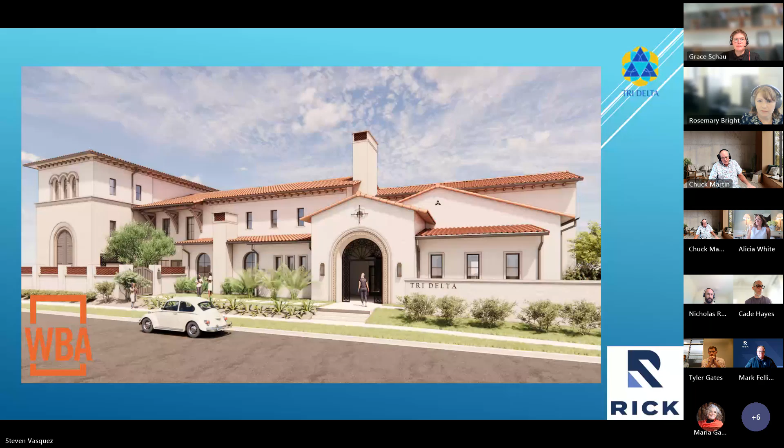Good morning. My name is Steven Vasquez, and I'm with Rick Engineering. We're located at 3945 East Fort Lowell Road, Suite 111. Thank you for your time.

We are here to discuss 2 landscape variances we are requesting regarding the development of the new Tri Delta sorority. Our presentation will cover the project background, our planning considerations, our requests, and also show that the U of A has accepted these variance requests.

This project is located at 1541 East 2nd Street at the northwest corner of 2nd Street and Cherry Avenue in Tucson, Arizona. It's approximately 0.6 acres in size and is currently fully developed with a single building and associated landscaped and paved parking areas.

The site, as mentioned earlier, is zoned R3. The existing building was constructed over 50 years ago. This new proposed project entails demolition of the existing building and the construction of a new building and associated pedestrian access, parking, utilities, landscaping, and drainage improvements.

The site is directly across 2nd Street from the walled main campus of the university. The uses around the site are all university related. There are no single family uses in the vicinity. The site is located in Precinct 1 of the Precinct Plan Update for 2009 for the university area. The adjacent area is developed with fraternities, sororities, universities, a lab, and a church.

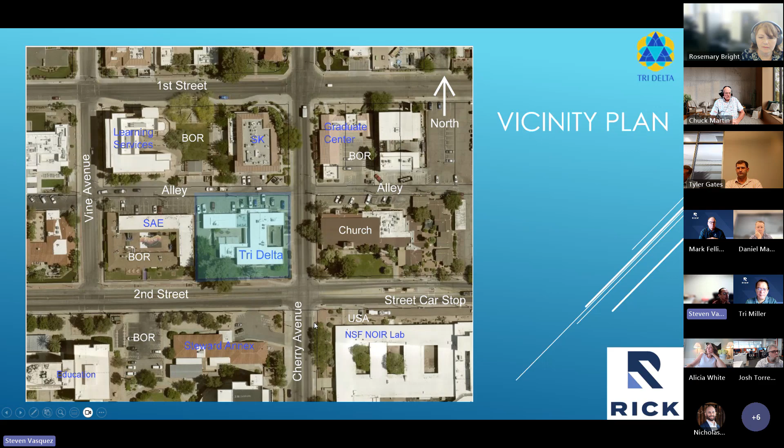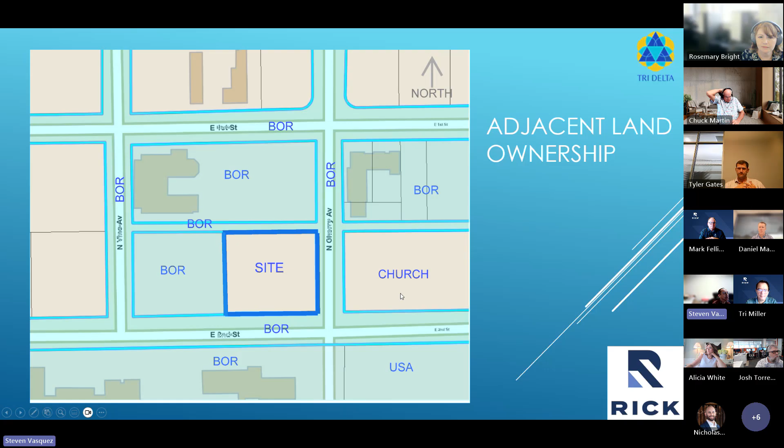To discuss the first proposed landscape variance, a reduction of the number of canopy trees in the alley vehicular use area from 4 to 0 trees. The second is the reduction in the width of the landscape border along 2nd Street from 10 to 5 feet. In terms of variance 1, the reduction of the number of canopy trees.

1 tree is required for every 4 parking spaces, so 4 trees would be required for the 16 parking spaces proposed. No trees are proposed, which is consistent with the parking in this block. There are currently no trees in the parking area, and we're just maintaining what actually exists.

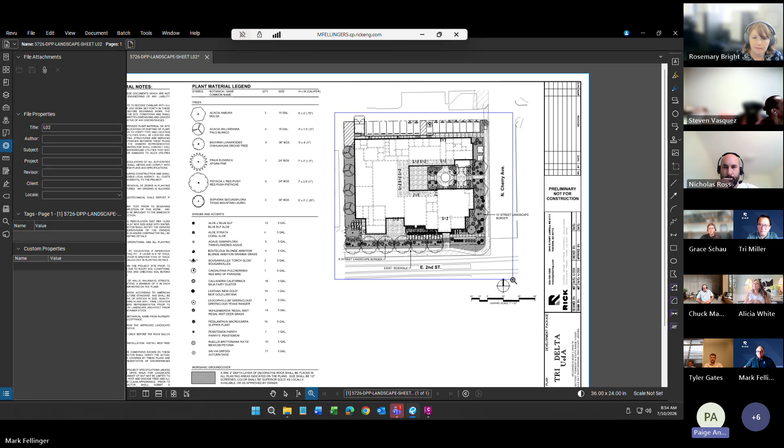Do you have a detailed landscape plan that you could show us? Sure, if I can share. You all able to see my screen? Yes, can you zoom in a bit? Sure. I think this is identical to the colored version, it's just black and white.

So the currently proposed street landscape border along 2nd Street - plant counts are based on the overall length of that street frontage, and tree counts per code are 6 trees that can be spaced irregularly rather than regularly spaced across the entire frontage. In order to open up some visibility on the east side for the monument sign wall and the main entry to the building, we've opted to show all the trees towards the west. But again, we show the 6 that would normally be required by code.

In terms of width, this area is the existing sidewalk, and this heavy dashed line is the property line. Normally from a screen wall or screening device in the landscape border, we would be required to have a 10-foot width. Currently we have a minimum of 5 foot on property, so that's where we're proposing all of the plant material. There's no request to reduce the amount of plant material - normal code requirement is that 50% of the landscape border has vegetative coverage, so with the 5 foot reduced width, we would still intend to meet that 50% coverage requirement.

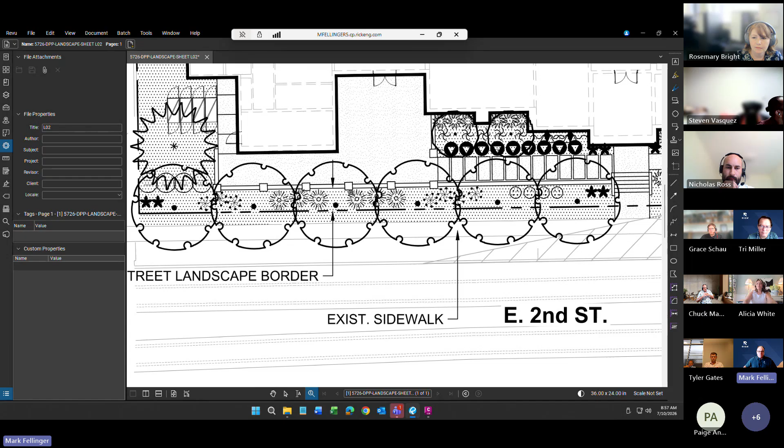One thing I would point out too - while we are requesting the reduction to a 5-foot width, we do have this additional 3 feet in the right of way. So the effective width between this proposed wall and the existing sidewalk would really be more like 8 feet visually, but the 5-foot would be on the sorority property. I just wanted to point that out.

Okay, thank you. Can you walk us through the plant selections, please? Sure, I'll stay zoomed in. So street tree along Second, we're proposing red push pistache - deciduous tree, provides some color. The intent is to partially screen from the street, but also provide shade in this patio area to the north. It's also a species other streetscapes within the university campus area do have, so we were trying to play off of that a little bit. There's not a real consistent tree palette in this area, but those trees are represented elsewhere.

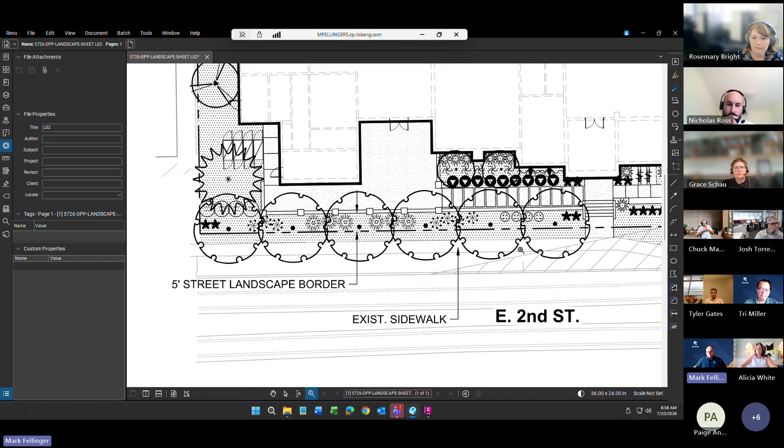And then fairy dusters for larger shrubs proposed, Muhlenbergia regal mist which is a grass, and then some Ruellia and aloe species for accent would be the landscape border species that we're proposing here.

Okay, and are they all irrigated? Yes, that's correct. Great. Paige, I think you're the only landscape architect here today. Do you have additional questions about the landscape palette?

I don't think the palette is so much in our purview. I've got lots of opinions, but I don't think I need to share them. I just wanted to clarify the difference between what I reviewed previously and what we're looking at now. So that's all.

It seems like the alley, I take no issue with the lack of trees in the alley, considering there weren't any before, and that's the status quo. I understand the restraints of that space. You would have even less parking if you were to put trees in there. And I guess conceivably you could say it will be shaded by the building for a good chunk of the year.

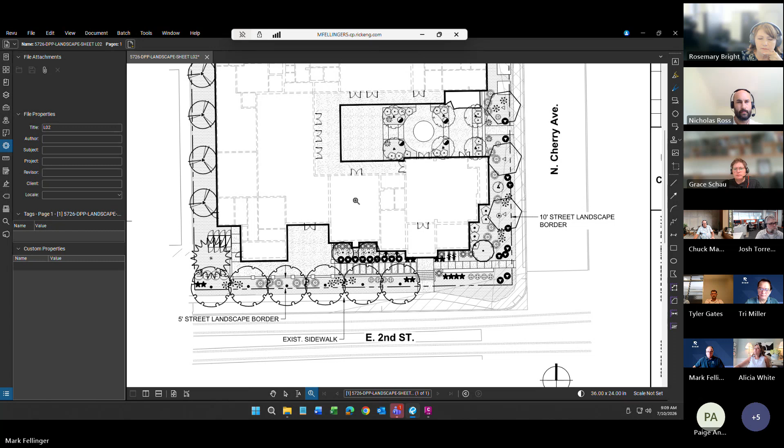At the current site, you've got palm tree, you've got some citrus. Citrus is a nice evergreen shade tree, and it kind of fits in the whole campus landscape palette with the palms. So I just feel like the red push pistache and the mulgas kind of stick out as not complementary to the surrounding landscape. And I understand that some of the other trees I'm seeing, like the Aleppos and eucalyptus, they're just so big and not really a good fit for this site.

Or mesquites. But if we're not going native, you could have fun with the palms on Cherry Avenue, complementing that great patio space. I don't know if you shared any of the renderings of the site. They weren't part of the presentation today, but they were in our packet. Just with the architectural design, something more semi-tropical would be nice.

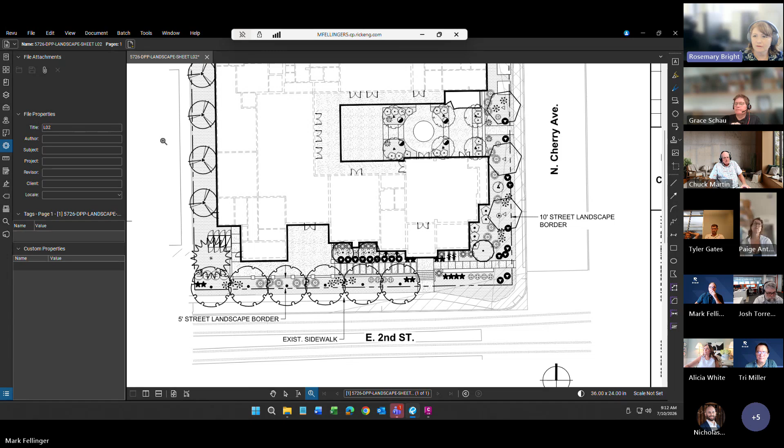Sure, let's shift gears and look at that. Gabriel, would you be able to bring the purview up on screen, please? Yeah, coming right up. Thank you. Okay.

So, Grace, you're referring to numbers 1 through 3 that talk about the reason behind the requirement or the need for the variance. So these are things we always look at a little bit too, right? I guess. Okay, yes.

So the special circumstances piece - if you could discuss a little bit more about why there's a special circumstance here, and is it self-imposed or is it created by the owner, or is there another reason why this is needed? And then number 3 being, is this property given any special privileges that others in the region are not? I think we looked at some precedents and it looked like it was pretty consistent. But I guess the self-imposed part is maybe something I'd like to hear discussed.

And then is there anything about the property itself, shape, topography, etc., that prevents it from being developed according to the UDC?

So I think one of the major factors for this site is that it is part of the University of Arizona campus, that it is not a typical neighborhood that you would see around Tucson. There's a church, additional lab buildings, fraternities, sororities. So it is unique in that it is part of the university campus, serving employees, sorority, fraternity members. So it has that unique flavor in that this has been developed over many, many years to create this type of streetscape that you see now.

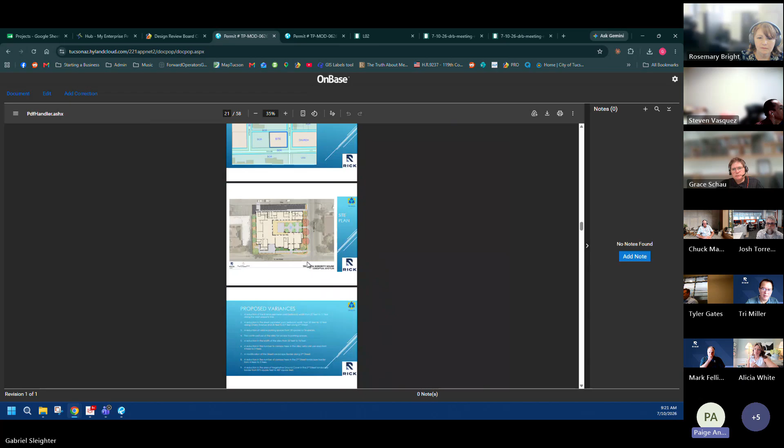All right, and you're talking, Grace, you're speaking to the setbacks on Cherry and Second, right? Or are you speaking to the parking as well? No, just specifically the variance requested on Second.

Yeah, I'm seeing a really small setback on Vine at the Kappa Kappa Gamma and the opposite building, but along Second, I'm not seeing such a reduced setback, unless it's the College of Education. It's hard to tell. Can we move to the images under the variance portion of the document?

Is it okay if I add something here? Please do. Yeah, Madam Chair and member of the DRB.

In the original plan, the first submittal of the development package, the building was actually closer to Second Street than what you're seeing today. The setback was roughly 10 feet, but the university had concerns, and after a couple of meetings with them, we pulled that setback back to roughly 15 feet, which they already accepted. Within city of Tucson jurisdiction, the setback is actually 10 feet rather than 20, but since this project fronts a local street on both sides maintained and operated by the university, the setback requirement is 20 feet.

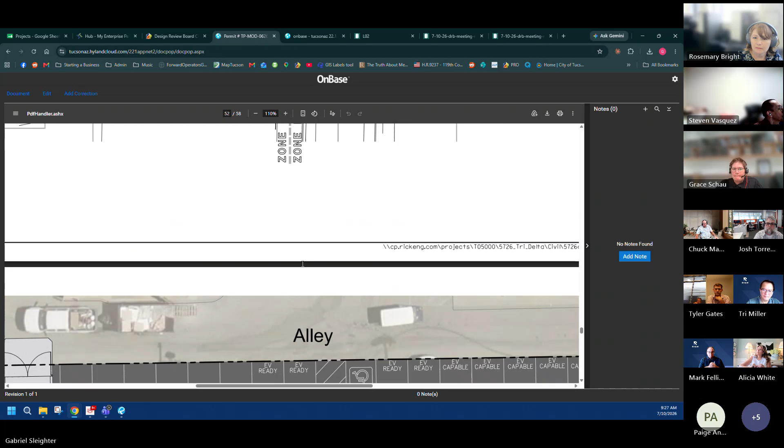I guess the follow-up question, Steven, and thank you for going through that, would be, could you not achieve that same articulation of the building with a 10-foot setback? I think with the architects' requirements, they had to utilize as much space as they could while maintaining the characteristics, and this is what they came up with. I think the architects could chime in a little more on how they came to this design.

This isn't the current design, though. Is this the current design? This isn't what we've been looking at. No, this is an older iteration.

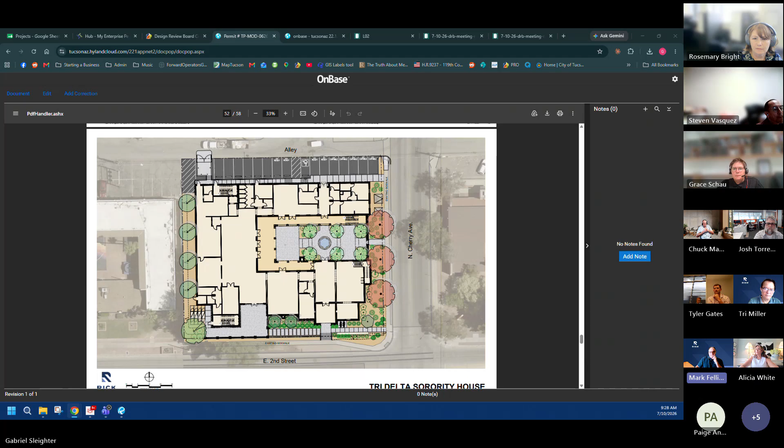I'm wondering if the reduction of the setback from 10 to 5 is due to the wall and the patio space, and if it's not the building, whether they looked at adjustments to accommodate a 10-foot setback on 2nd Street by adjusting.

Hey, you're saying that we went from 10 to 5 on which setback? Yeah, I think that's 2nd Street. My fault for using incorrect terminology—what we're referring to is not the setback, but the landscape border, from... Right, that's what I meant. What we updated to was we did another squeeze for the building and got it within 15 at the bottom, so it's only a 5-foot variance for the building setback on 2nd Street, which gets us more in line with other buildings. Thank you for clarifying, my apologies—I am referring to the landscape border.

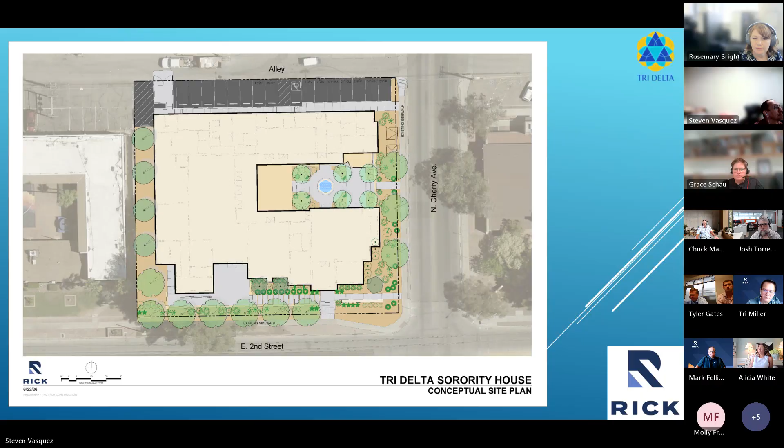Look into a rendering of the front. Yes, I believe it was the first slide of the presentation that Steven initially put up. I don't know if we have a different version. There you go, yes sir. Oh, I'm not sharing. Oh no, I was—I thought yes, we had seen it. My apologies, we see it.

Okay, so just to take us back to what we're looking at in terms of purview: the concern was, is there a reason why the applicant can't maintain the required landscape buffer? The statement we were read explained that they were expanding the capacity of the building as well as bringing it up to code—they're going from 2-story to 3-story, and they're maintaining the building setbacks. It's just the landscape buffer they're asking for a variance on. Any questions or concerns about that?

Anyone on the DRB have a concern about that? Well, it sounded like Grace, you were concerned about it.

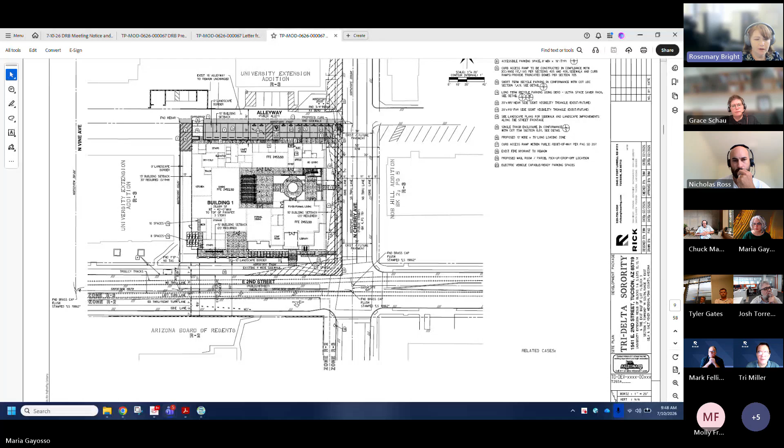We're going to have to move that wall. Is that different? Roughly 4.5 feet.

Nick, did you have a point? Yeah, to board member Schau's point, you can move 5 feet of the required 10-foot landscape buffer into the right of way with generally City of Tucson approval, due to, I mean, that commonly is who runs the right of way, but in this case it is Board of Regents. So assuming they would be open to that, it is code compliant if you do 5 and 5, on property and in the right of way. But due to what was proposed initially, at least, they still would not be compliant. I think it would have maybe been a total of eight and some change as drawn. So that is an option.

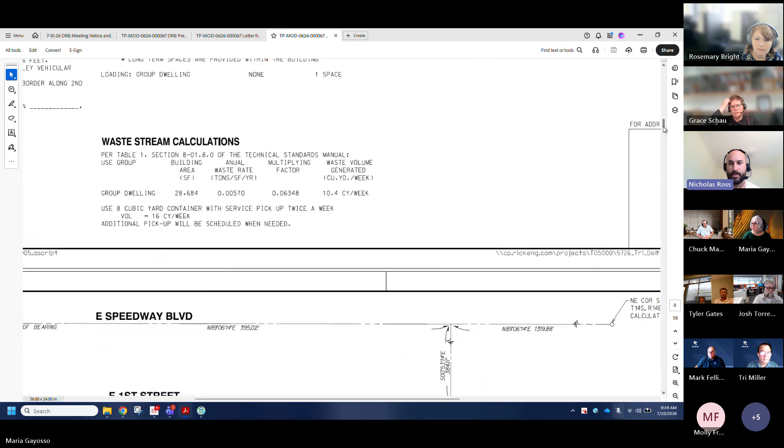If I could just add to that, we do have approximately 3 feet from the back of walk to the property line, so that would potentially be the right-of-way area that Nick was referring to. And as he mentioned, it's fairly common for us to ask and to be granted that additional 5-foot space or whatever it might be within the right-of-way.

In this case, I think the university prefers the actual plant material to remain on the property, which is what we're doing. But as I mentioned previously, with the 5-foot reduction on property granted, visually you do still have that 8, and it's actually probably 8 and change, closer to 9 feet from back of walk to the wall. So from a visual standpoint, we're very close to the required 10 feet based on what a passerby would see from the street.

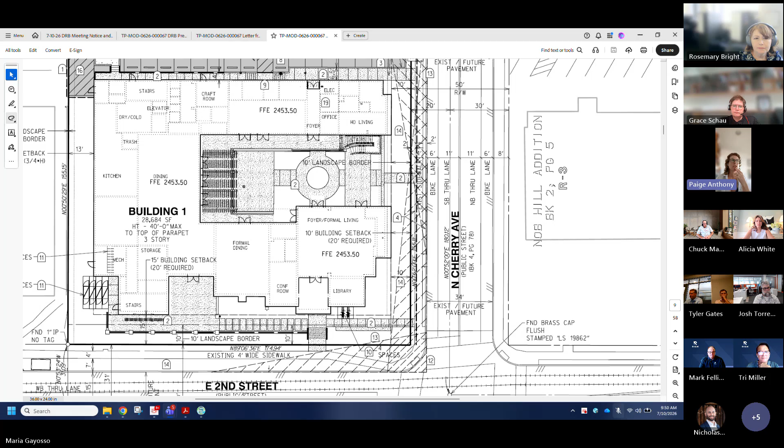I understand that. I think it's just looking at the variance requirements and whether it's self-imposed or not is the challenge. When we look at number 2, that such special circumstances were not self-imposed and created by the owner in possession of the property. So if that could be explained in a way where having that wall where it is is not self-imposed, then I think everything would be fine.

I'm curious what other DRB members think. I want to chime in on something.

I can't remember who said it, but I know you're also trying to meet a programmatic requirement for a certain amount of outdoor dining space because of the size of the chapter and the number of people that will be at some of these events. I think it's nice that they want to have outdoor dining space and enjoy the great outdoors, and that's part of utilizing the landscape. So I don't personally object to that, but Paige, I do get what you're saying too, that we don't want to grant any kind of special privileges that aren't granted to other applicants. But to me, the programmatic requirement of the need for a certain square footage of outdoor dining space is what causes the wall to be in the location that it is.